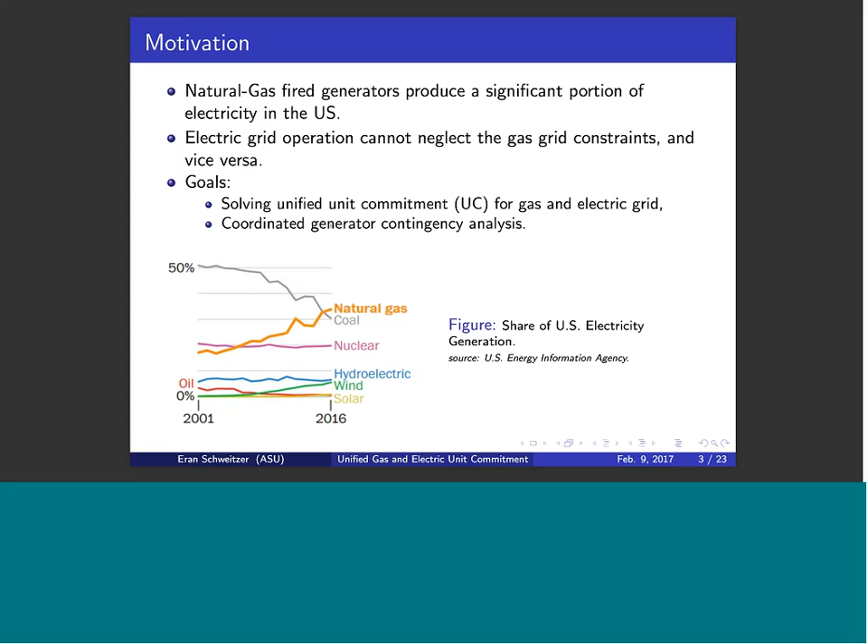As Anna mentioned, the tie to security is that we need to first build a framework where we can model how these two systems are interacting with each other. Then once we identify how that works, we can explore the different vulnerabilities and understand what are the impacts of targeting them. So that is the general framework we're working under.

This is another interesting picture of how different areas create electricity, and you'll notice all the orange. The one thing I'll point out, the simulations that we run are on fairly small generators. I'll just point out that you actually see quite a few larger orange circles here, meaning that we're actually considering a fairly rosy picture. Things could actually get much more serious as you allow for larger and therefore more gas-hungry generators.

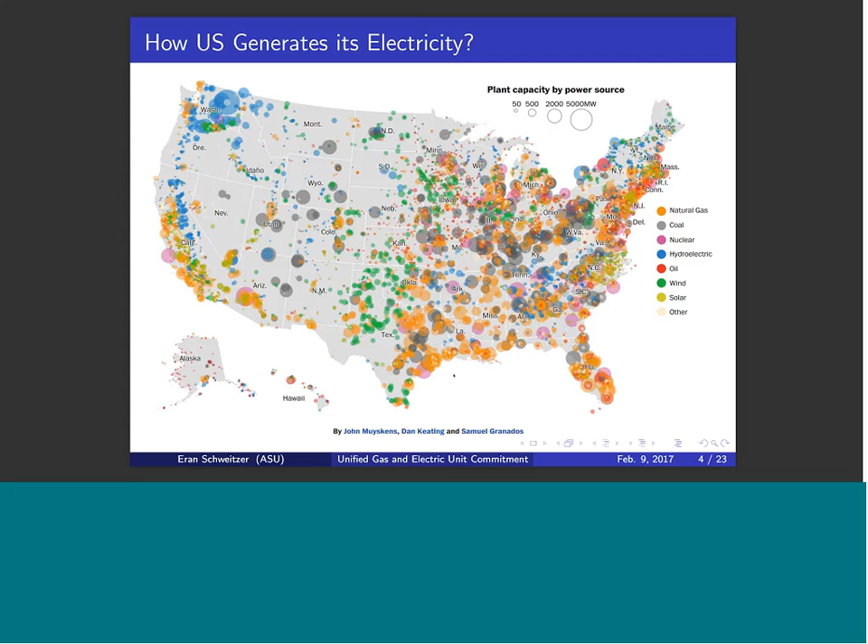So let's talk a little bit about how we model the gas system. We have a fairly simplistic view of it with four main components. We have gas wells and storage, which are points where gas is inserted into the system. There are the pipelines that then transport the gas between different points. There are compressors at certain places that control the pressures and therefore the flow. Finally, you have different demand points, and essentially we'll be modeling gas generators as demand points.

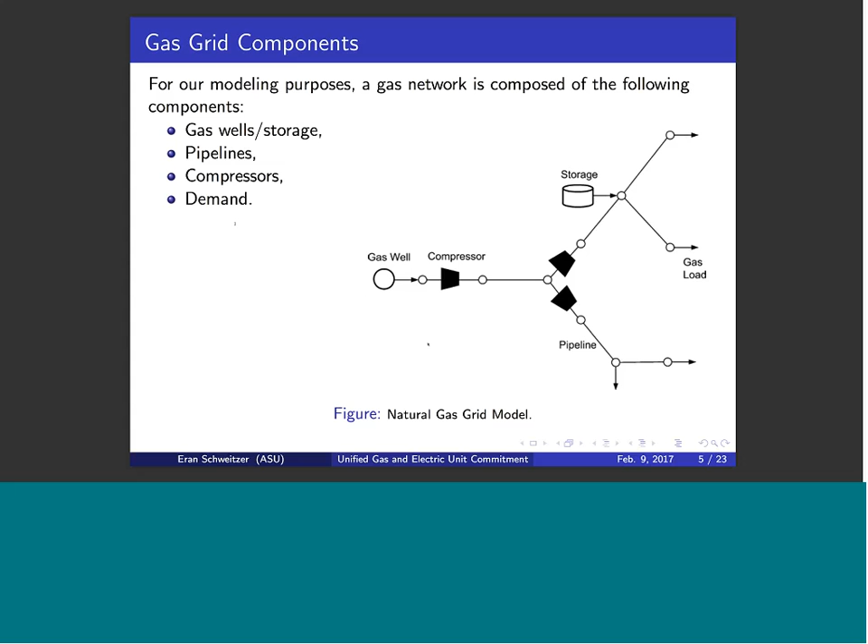We're considering, for the purposes of this presentation, a one-dimensional steady-state formulation. When you look at things in that way, you basically have a relationship between the square of the pressures at two points in the pipeline with the square of the flow and some constants that account for friction, diameter, etc. The thing to notice here is that we have this relationship with the squares, and there's the sign of the flow, and that will be a lot of what we focus on in our formulation, is how to unpack this sign function here.

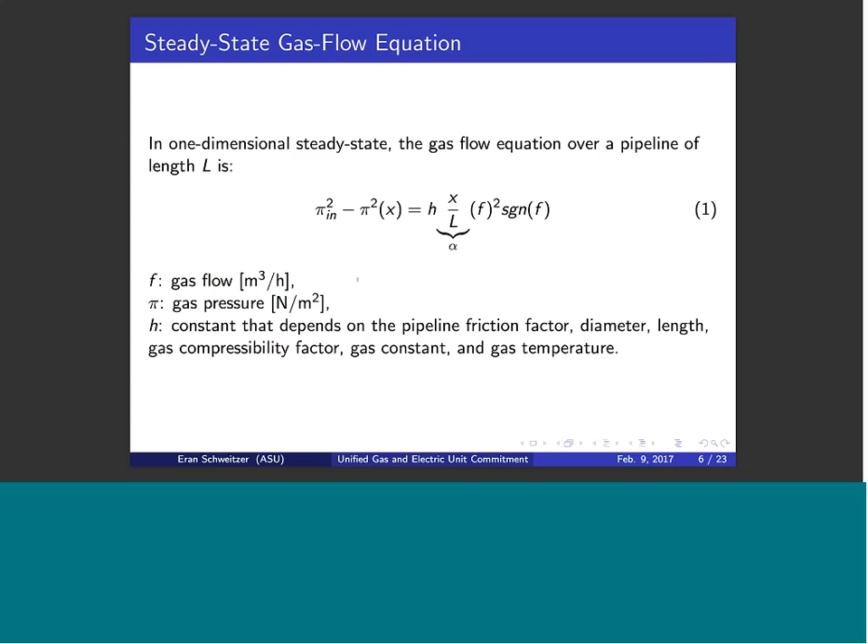I included the units here just for reference as we move on. So the basic formulation of the optimal gas flow is as follows.

We have the gas generation, this G at a particular time point at a particular well, times some price for producing gas at that location. We are introducing something here which is a gas reserve, and you can think about it as a certain headroom that a particular generating point is allowing itself to have so that it can potentially increase some more. This is not necessarily often seen in these sorts of formulations. It mirrors a little bit the electric reserves, and I will get to some of this at the very end when we talk about future directions. So keep this reserve point in mind.

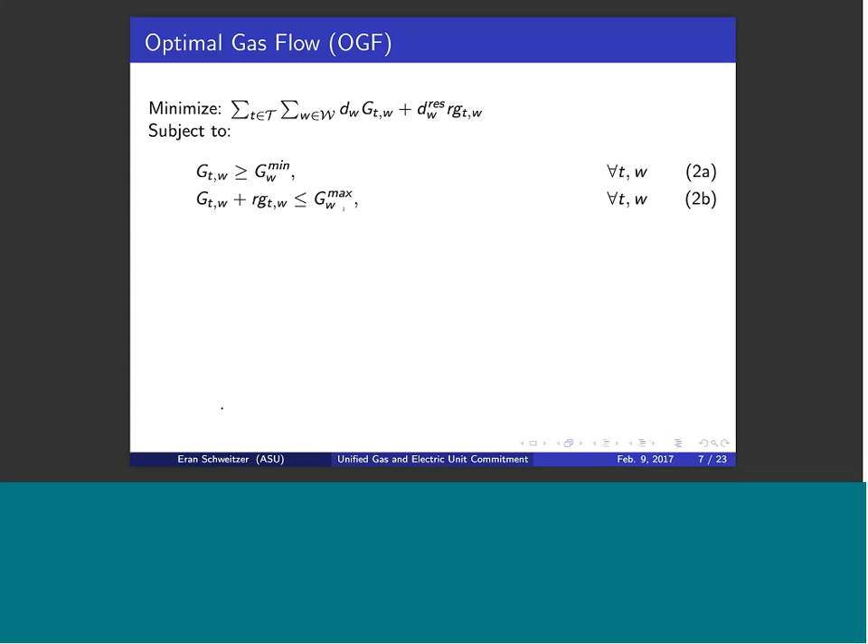So then we have a few constraints, namely that a gas well or source point has to produce a certain amount—it cannot produce infinitely small amounts. The total amount that it produces plus this headroom reserve that it is leaving must be below its maximum possible output capacity. Then we have a nodal constraint where the sum inserted at a particular node, plus the sum flowing into that node from pipelines where this node is defined as the to-node of the pipe, minus the flow going away on pipes where this node is the from-node, is equal to the total load.

So that is the load that is consumed at that node. And then we have the constraint on the flow that relates to the compression ratio. We have the square of the pressures, the flows, and this alpha is just saying where along the line, percentage-wise. If you just put this to 0, meaning it's at the very beginning of the line, then you have the standard compression ratio equation. And finally, we have pressure limits on the pipelines.

It must remain within a certain boundary. So just again, a note on the compression ratio: we assume it's greater than 1, and that's where the sign exponent comes here. And it is given as a parameter. We're going to not let this vary, but rather say it is fixed at a particular thing, which essentially fixes also the direction of flow in those particular edges, which we will refer to as active edges.

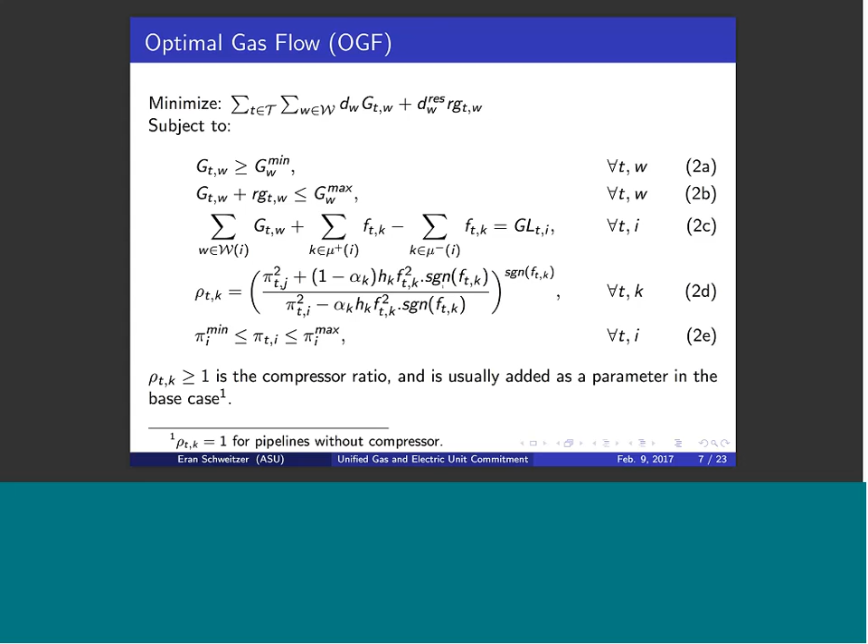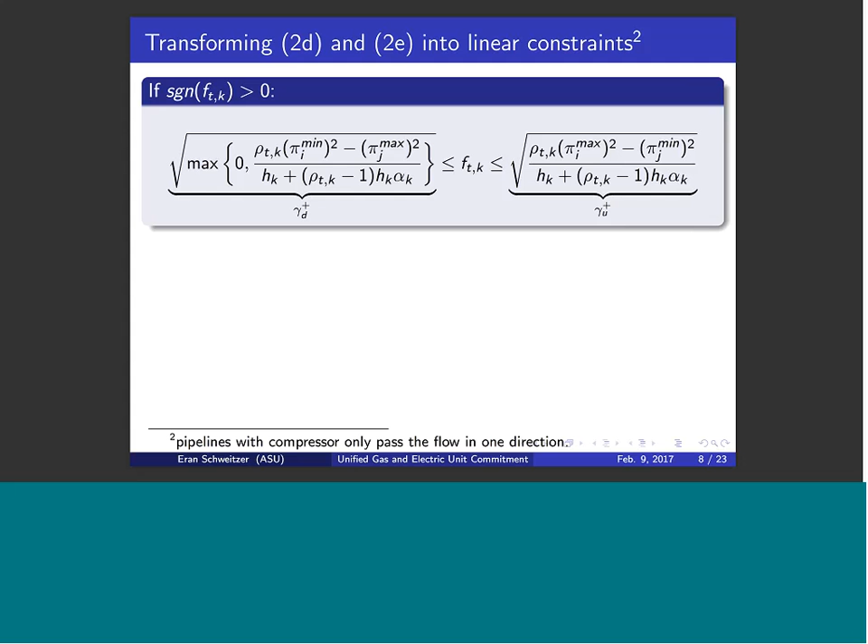So actually, let me step back. This formulation is fairly nice and linear and friendly, except for this messy equation. So what we're going to do now is try and look at ways of tackling this constraint to make the problem more solvable. If we assume that we know the sign of the flow and that it is positive, we can change the equality so we can constrict the flow between these two square root terms. We've essentially just solved for flow from the previous equality. The other option is that the flow is negative, and then again we have essentially the other option.

And what we've done here is essentially mapped our pressures into squared pressures, which is not a problem since pressure is a strictly positive, or strictly non-negative, term. We have essentially converted in this way a pressure limit to a flow limit. So the key point is that the nonlinear constraint is mapped onto two linear constraints. These are now essentially known terms, these gammas, and the mapping is one to one. So we haven't actually made any simplification.

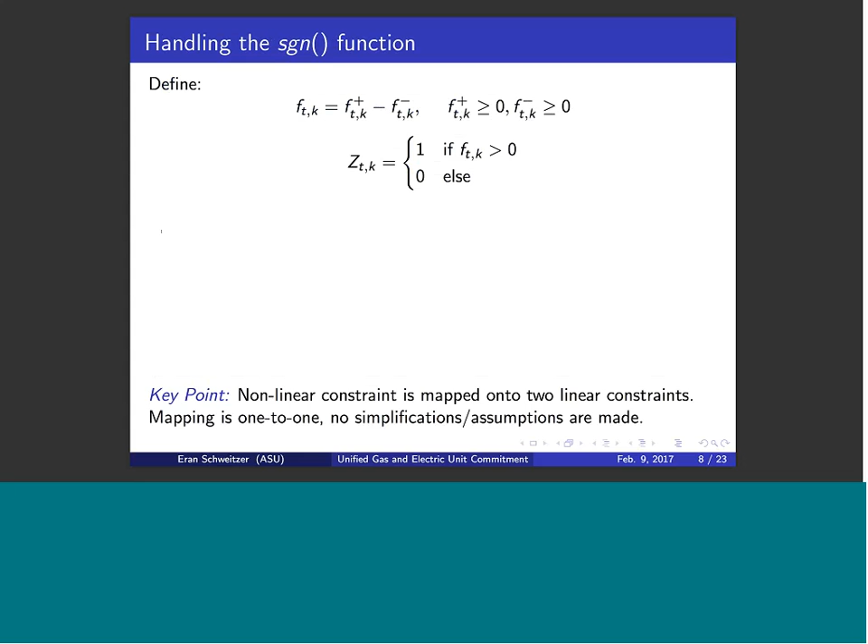However, we still have this if-else statement that we need to address so that in the optimization we know which constraint to account for, and that's what we look at next. So what we do is basically create disjunctive constraints. We decompose the flow, saying that it is both a flow in the positive direction and a flow in the negative direction, where both of these superscripted f's are non-negative. And we introduce a binary variable for each edge that is 1 if the flow is positive and 0 otherwise. In this way, we can introduce the following constraints.

We have that the flow on a line K in the negative direction is 0 for edges that we're calling active. These are the ones with the compressors, since a compressor forces flow in a particular direction, so there we do not have to consider which way gas is flowing. The limits on flow are these gammas that we derived previously, which had to do with the squared pressure, times this known constant for a given line, times these binary variables. And in the negative direction, we have times 1 minus these binary variables.

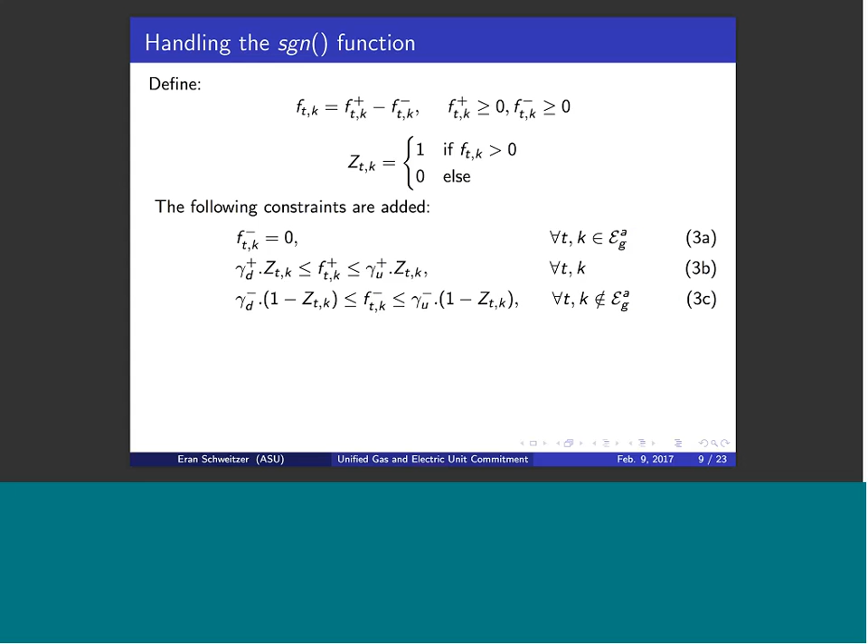So, for example, if z is 1, then this will impose the necessary limits on the positive flow, and the negative flow will be forced to be 0. And if z is 0, then we have the other situation. So a fairly standard disjunctive constraint formulation. The pro is that we're now implicitly, through these binary variables, considering the flow direction. The con is that we have introduced binary variables, which make the solution process more difficult, and we have basically doubled the number of constraints for flows.

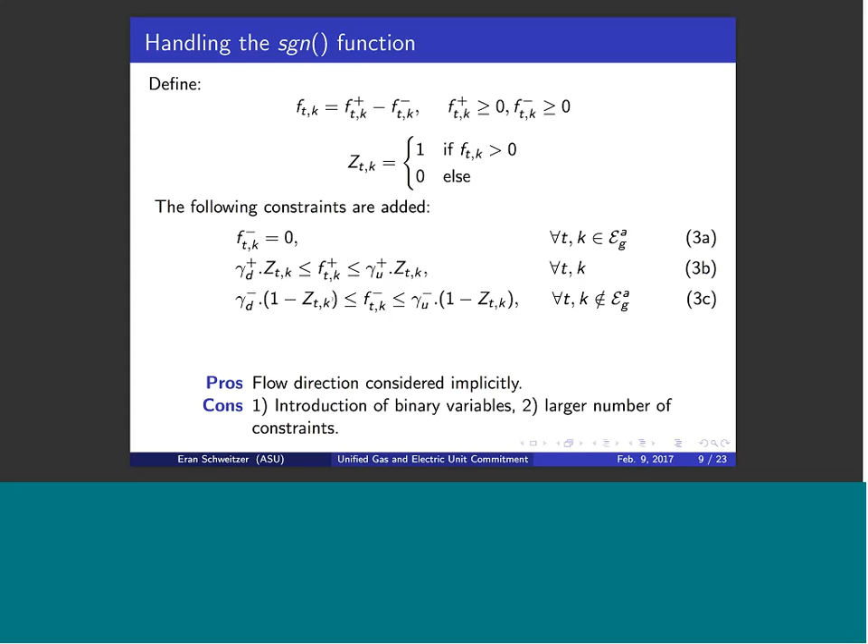However, we now have a mixed integer linear program that we can solve. So let's move into the case formulation where we test how this behaves. We use a slight modification of the Belgian gas grid, presented in a paper by De Wolf and, I believe, Smeers, but don't hold me to that pronunciation. And I was slightly confused: this line over here, where my cursor moves around, is the boundary, the border of Belgium. It's not actually a pipeline. So this is a radial grid.

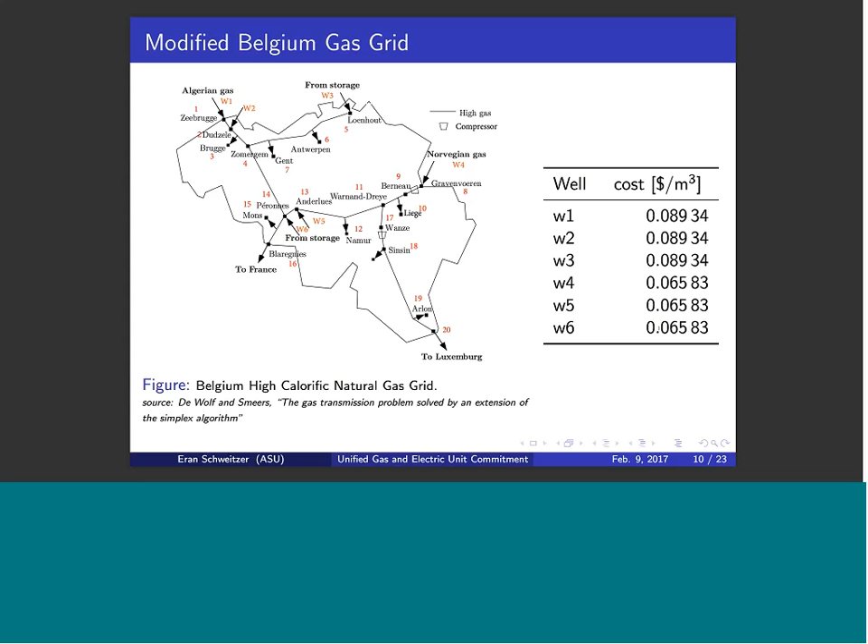You can see it has two compressors and six different gas wells. In the following slides, we'll report cost for the optimal gas flow. The cost we were using for a cubic meter is this, in dollars. Obviously they use euros in Belgium, but we decided to use dollars for our purposes. So when we run the simulation, these are the results that we get. You can see the compressor settings here. Things are pretty flat, which is expected since there's not a whole lot of fluctuation in the gas system. More than anything, this just shows that we have a stable solution, and we can now move on to considering the joint problem with the electric formulation.

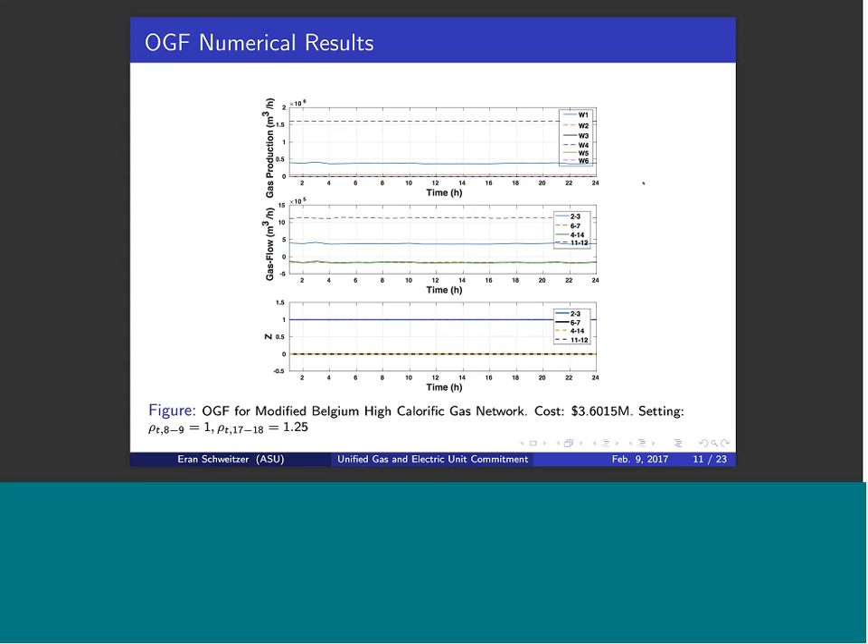So now we're going to start combining the gas and electric unit commitment. I'll point out that I don't go into detail in this presentation about the electric unit commitment, partially assuming that it has been covered more frequently, but I'll be happy to answer questions about that at the end. I realize that's not as explicitly stated in these slides.

So we make a few assumptions in order to make the conversion between electricity and gas. We assume that a cubic foot of natural gas contains this many BTUs. This is then converted to megawatt hours, and for the electric grid we use the RTS-96 system. I have a picture of that coming up in a couple slides.

We took the 50 megawatt generators and treated them as gas-fired combined cycle turbines with an efficiency of 50%, and the 20 megawatt generators are treated as strictly gas-fired turbines with an efficiency of 35%. These are not the original turbines in the system. There are actually no gas turbines in the RTS system, so we just made these assumptions, which seemed reasonable.

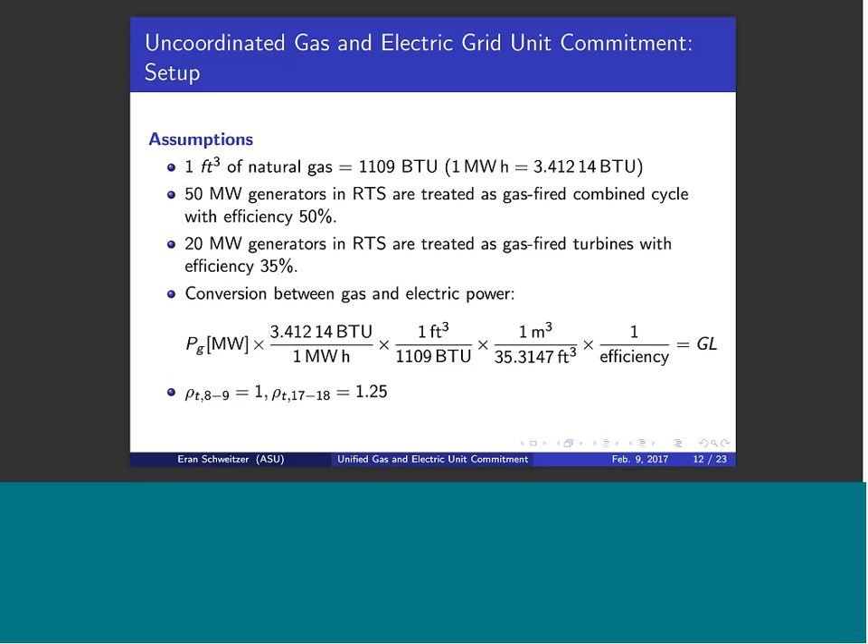Using this, we can then convert power in megawatts through some dimensional analysis to a gas load, which will be in meters cubed per hour as defined previously. We keep the compressor settings at the same place.

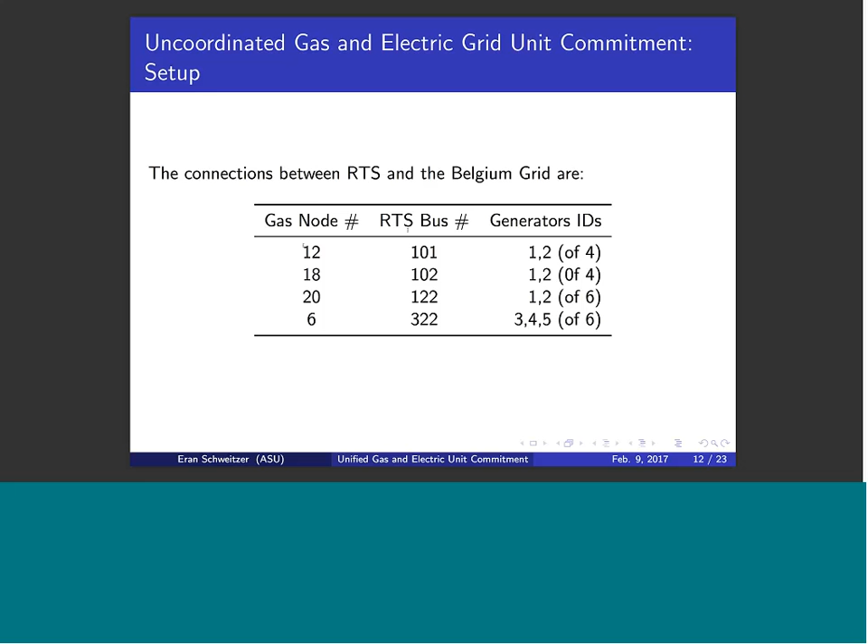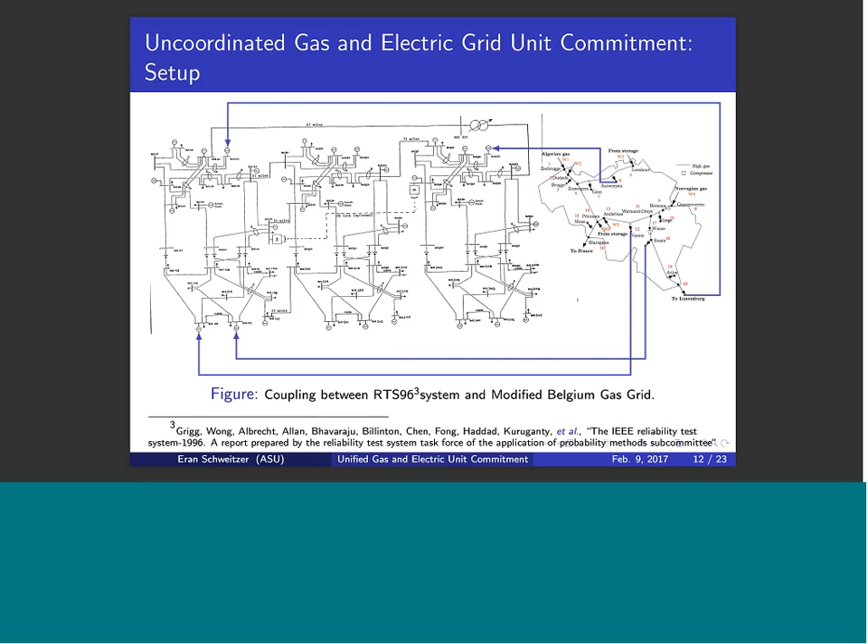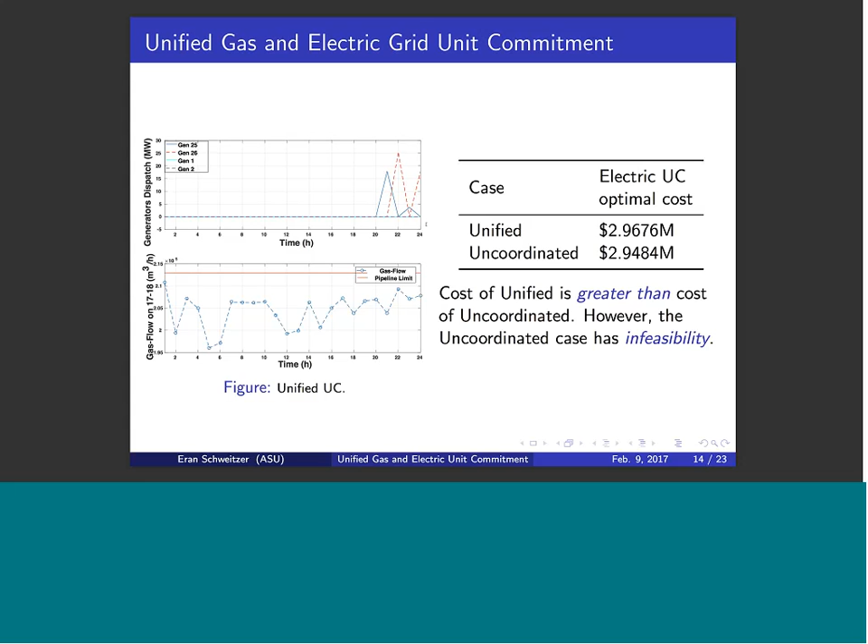That is actually not so surprising because a lot of small gas-fired generators are not committed to supply base load, but are rather committed as reserves, particularly non-spinning reserves, because they have a very fast ramping capability. This led us to extend this analysis to generator contingency, because gas-fired generators provide much of the non-spinning reserves and are critical during these situations. But the added power they're now supplying, and therefore the added demand on the gas grid they'll withdraw, has to obey the pipeline constraints.

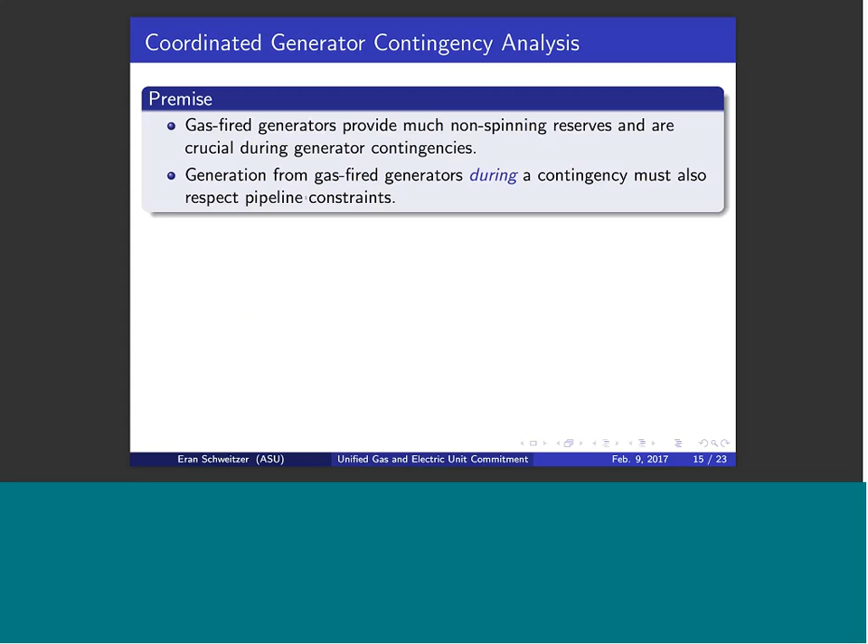So what we need to do is add more constraints. We add the following constraints to the typical generator contingency analysis, where C is a particular contingency. For a particular C, we assume a generator has failed. Recall we had these RGs, reserves in the gas grid, essentially some headroom left. With the superscript C, that is what's actually being activated during the given contingency, and that cannot be any greater than what has been pre-allocated.

This constraint is simply a balance: the amount of reserve electricity generated by gas-fired power plants, times this conversion factor, has to equal the amount of added gas flowing in the pipeline due to this contingency.

Then we modify again the nodal balance equation to include this added variable in the power inserted into the gas grid and in the power withdrawn at the gas-fired generators. Finally, we have to adjust the flow constraints as well, since depending on which generators are failing or where new gas might be coming into the pipeline, things could theoretically change. These are the exact same constraints as before, but for the flows in this particular contingency.

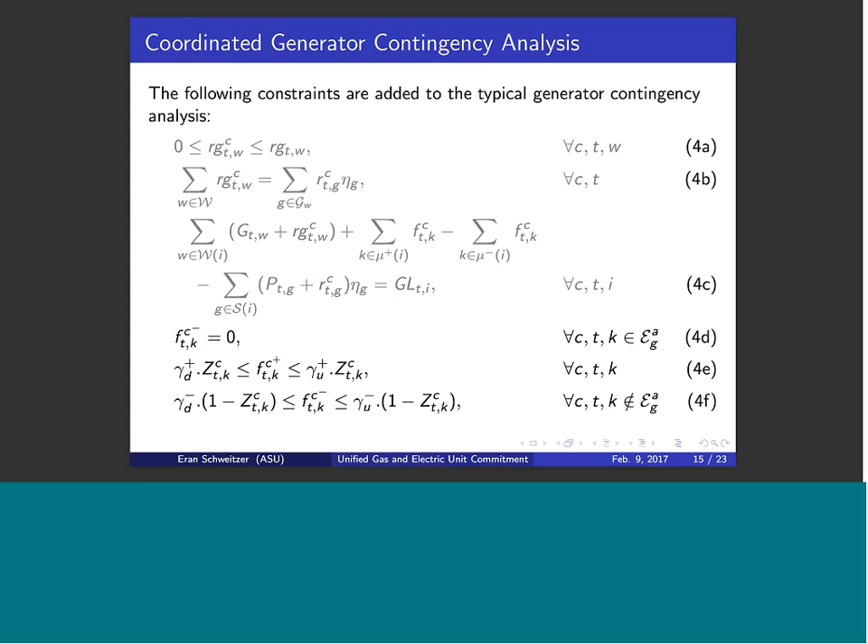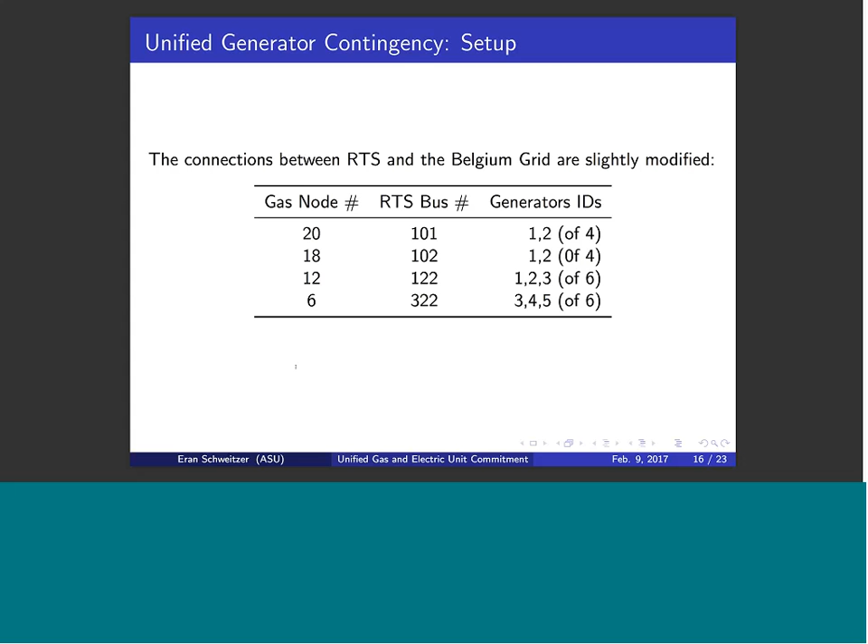That is the adjustment we make to the formulation. For the test case, we modified slightly the mapping between the gas nodes and the RTS bus nodes. Just for reference, numerically this is what it is if you're familiar with the RTS case, and schematically, that is what this looks like.

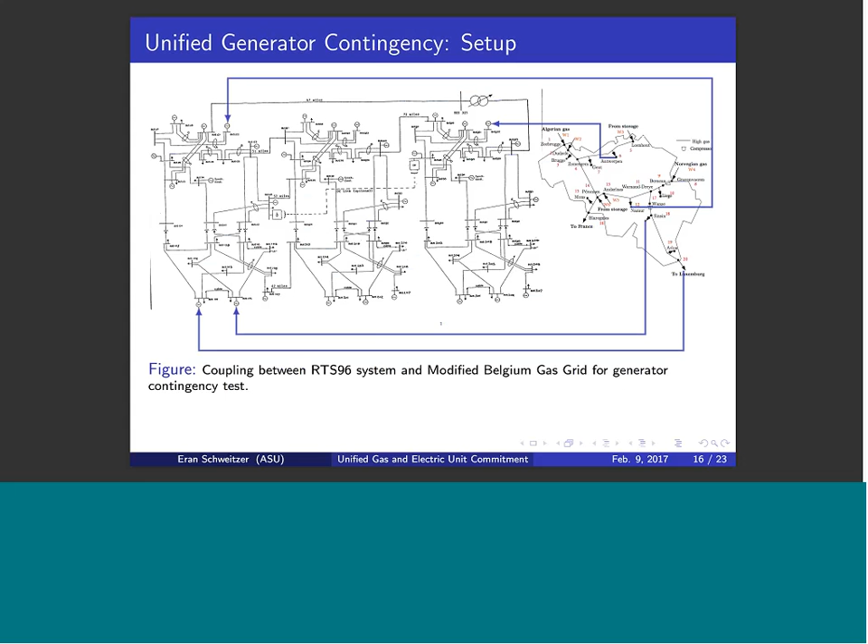When we perform the simulation, we get the following results. In this first plot, we're looking at a particular contingency where generator 90 in the RTS case has failed. It's a fairly large generator, and we see how the different generators are responding. Over here, we see the value of these reserves at the different gas wells, and we see that they are following the behavior of the gas generators, which is to be expected.

That is essentially those constraints that we just added, that is what they require. Side note: I don't have a plot for this, but we did a separate test considering what if all the reserves at a particular set of gas generators were called up. What would that mean for the flow on the pipeline supplying them? We saw that the pipeline hits its limit but does not exceed it, which was a good sanity check that the optimization was working correctly. So the gas generators have not procured more reserves than they are actually capable of delivering, given the constraints of the pipeline they are connected to.

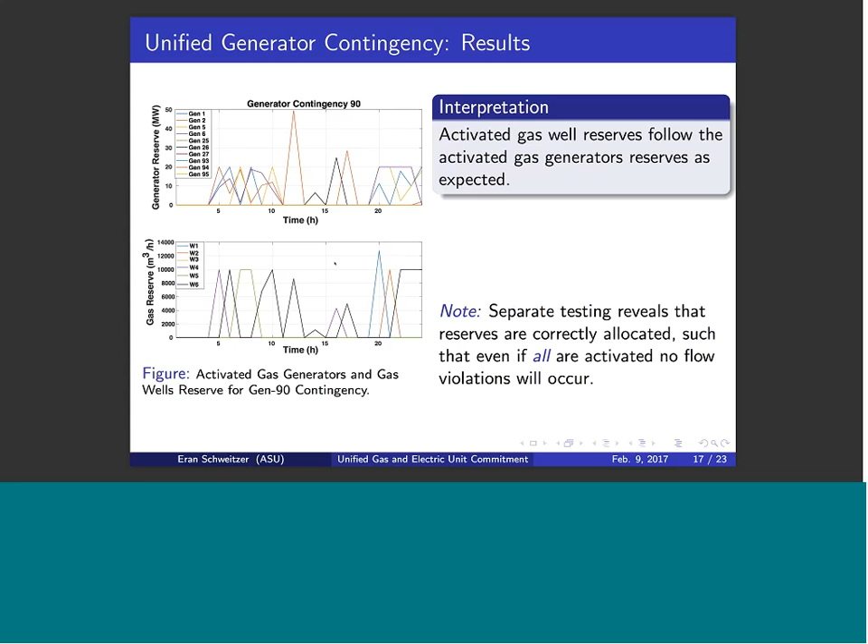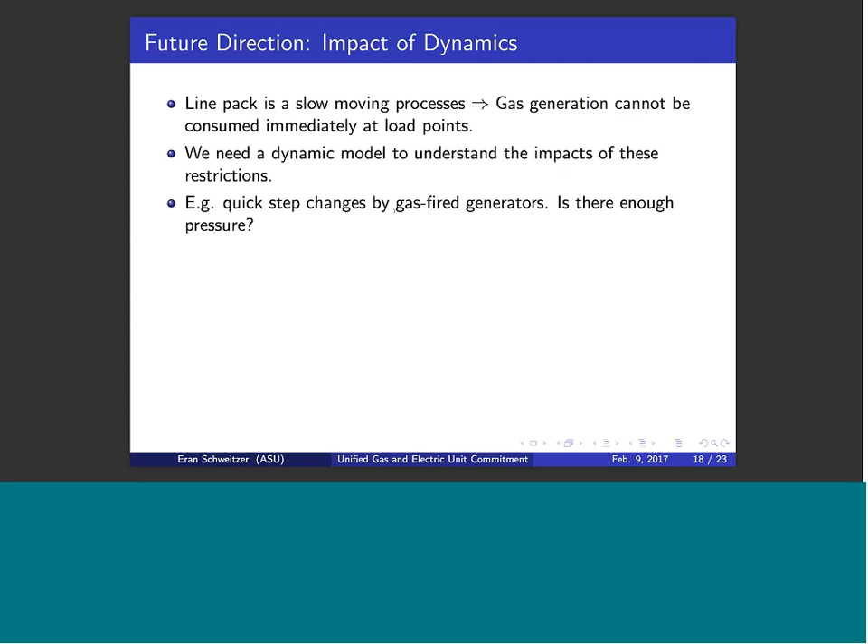So that is one future direction we are considering, to find a vulnerability, which once discovered, can be mapped onto different security and cybersecurity concepts.

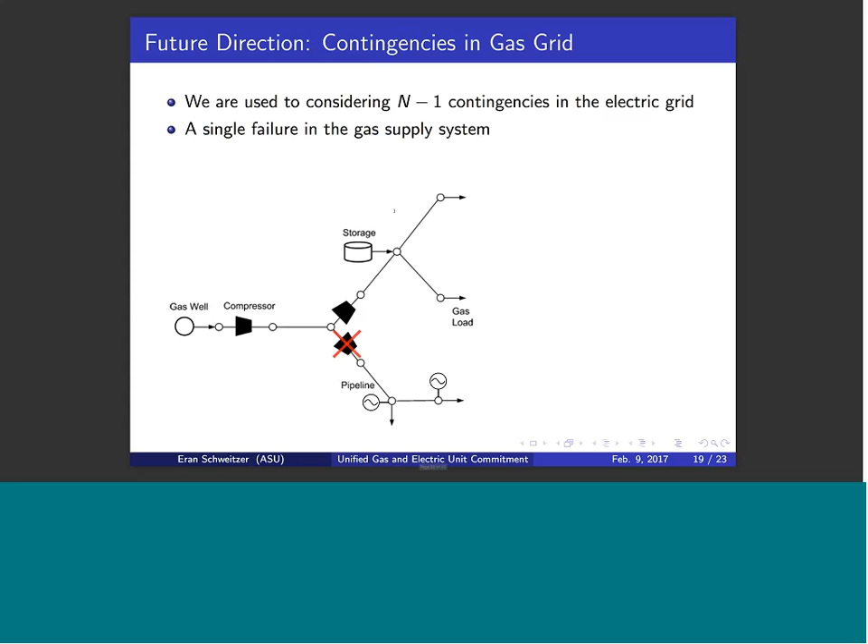The second direction we're looking at comes more from the component failure perspective. We're very used to thinking about N-1 contingencies—that's exactly what we just showed in terms of generator contingencies in the electric grid. However, if we have a single failure in the gas supply system, that can lead to a set of contingencies in the electric grid.

And so we need to consider specific sets of N-many contingencies. This is actually suggested in a NERC report, which I cite here, from 2013 about reliability assessment. They mentioned something similar, although I did not see in that report that they addressed what to do about this.

So we're trying to understand what is an appropriate way of modeling this and taking it into account, all while realizing that there is one solution to all of this, which is to simply say gas generators shouldn't be relied upon for anything—but that is clearly not a viable solution. So we need to find the happy medium.

The other thing I find interesting about this approach is that we don't have to assume the compressor totally fails, but rather that there is a particular decrease in capacity that impacts simultaneously multiple generators. It's possible that simply reducing the capacity by some amount is sufficient to cause something equivalent to a contingency. So this is the other direction we are considering.

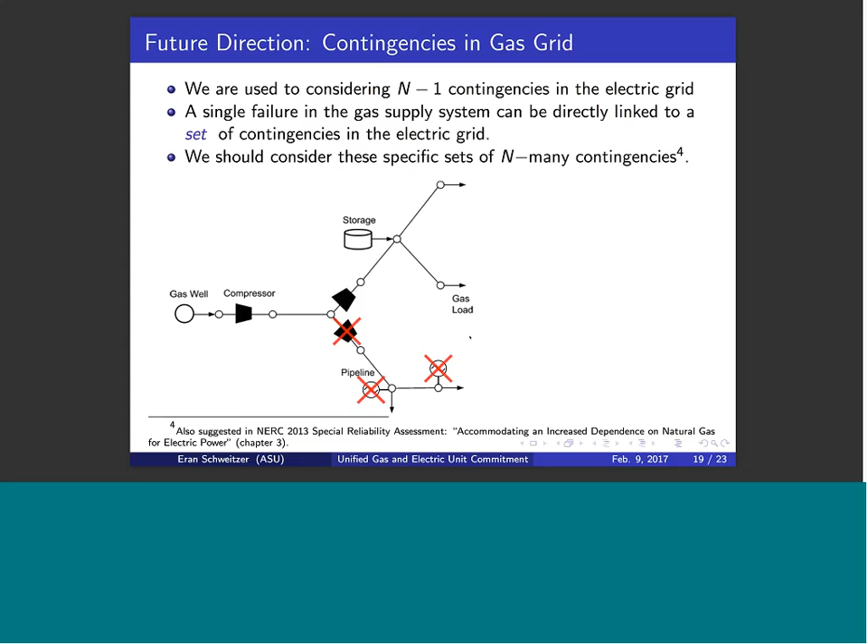In conclusion, what we have shown is that violations in gas grid limits are caused due to uncoordinated planning between the electric grid and the gas system. Therefore, this needs to be rectified, and we proposed a unified mixed integer formulation capable of doing that. We then took this formulation and extended it to generator contingency analysis, given the fact that gas generators

are particularly important to the electric grid in the contingency setting, and therefore we want to make sure that the reserves they are promising can actually be supplied in terms of their fuel.